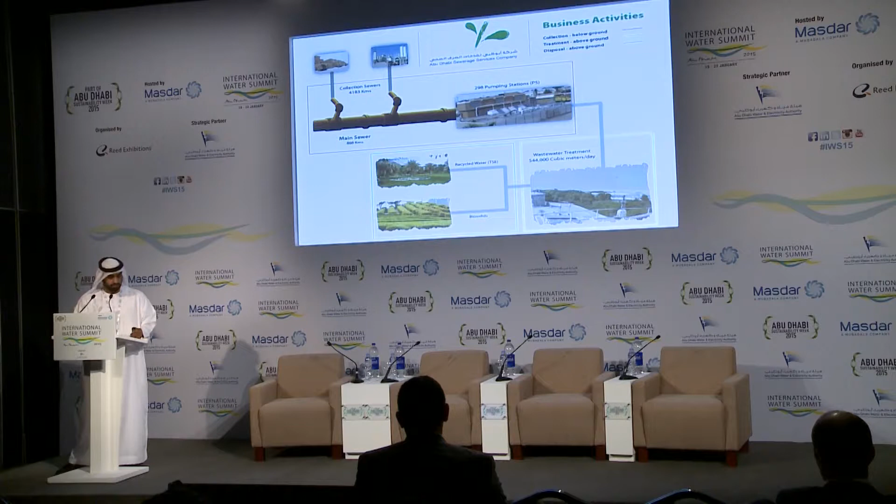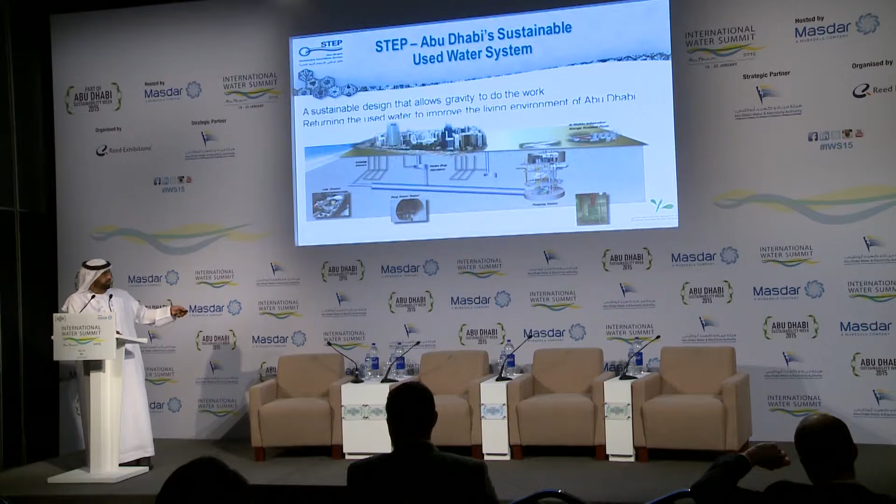And this is the pumping stations that we're building now in STEP, and they pump all the sewage coming from Abu Dhabi Island and mainland to the treatment plant existing in the Wathba area.

So STEP, if you go around Abu Dhabi, you may see the signs of STEP, but really it's just a sign of a place, a manhole that we work in, or we're using to lower the machines, lower the manpower, or the plants to use it. So really it's an invisible surface, where you will see later on the visible surface with the green area, improving Abu Dhabi.

I take this word from late Sheikh Zayed. Really, it's a word that I always remember. I will read it word by word. What he's saying here is that we cherish our environment because it is an integral part of our country, our history and our heritage, on land and in the sea. Our forefathers lived and survived in this environment because they were able to do so. They recognized the need to conserve this environment, to take from it only whatever they needed to live, and to preserve it for succeeding generations. So I really take this word and look at it as ADSSC and as an employee.

So partly, this is the STEP concept. Why STEP? Due to the aging of the existing surfaces, the capacity limits that we have, we are over capacity. And the future development happening in Abu Dhabi, the economical booming, all the building industry, and the time constraints - really we need a fast method to relieve Abu Dhabi and improve the infrastructure.

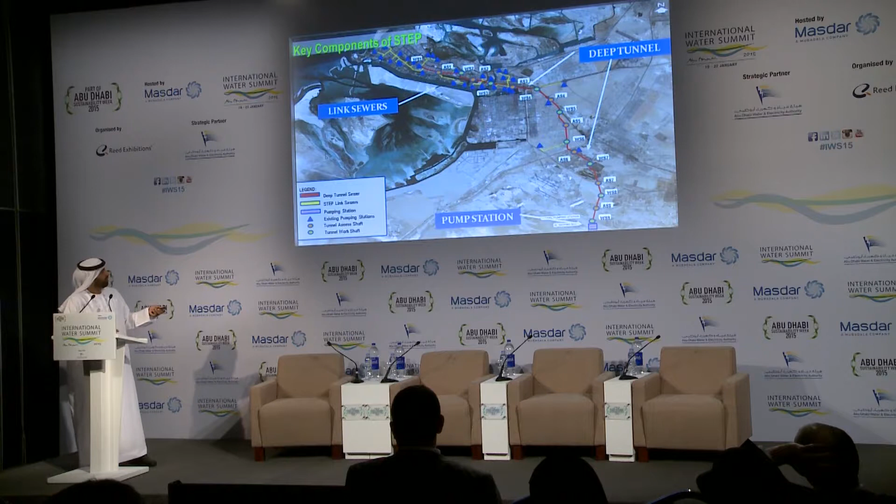So you see along the line, we finished 100% of the tunnel, 41 kilometers, and I'll show you a photo of really what you're going to see on top - I mean after we finish the tunnel, what you will see on the surface.

This is the link sewers. All the green lines are what we finished. In total it's 45 kilometers - we finished around 38 kilometers out of 45 kilometers from the link sewers.

So you see, we work really in a congested area. This is just in front of Khaldiya Mall - this line here is in front of Khaldiya Mall. Here, behind Spinneys, next to the Corniche area.

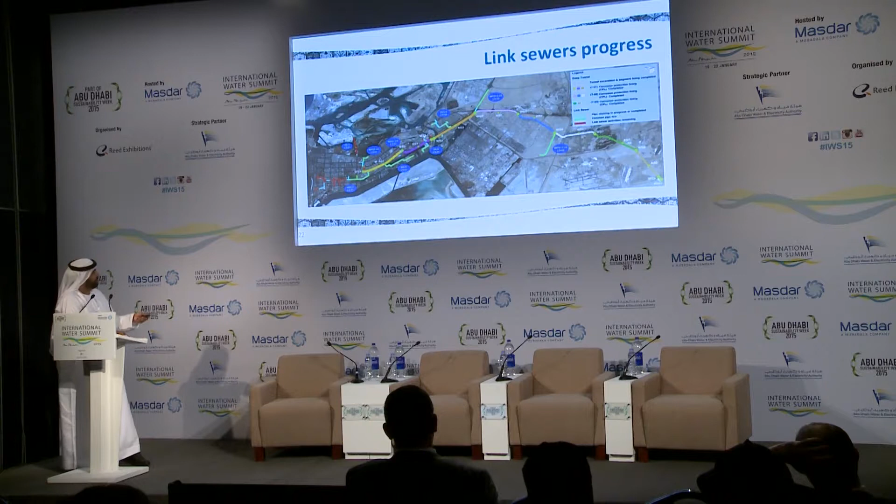So we're almost there. This is another picture of the link sewers. It's LS1 - we finished 44%. And LS2, which is the mainland, we finished 67%.

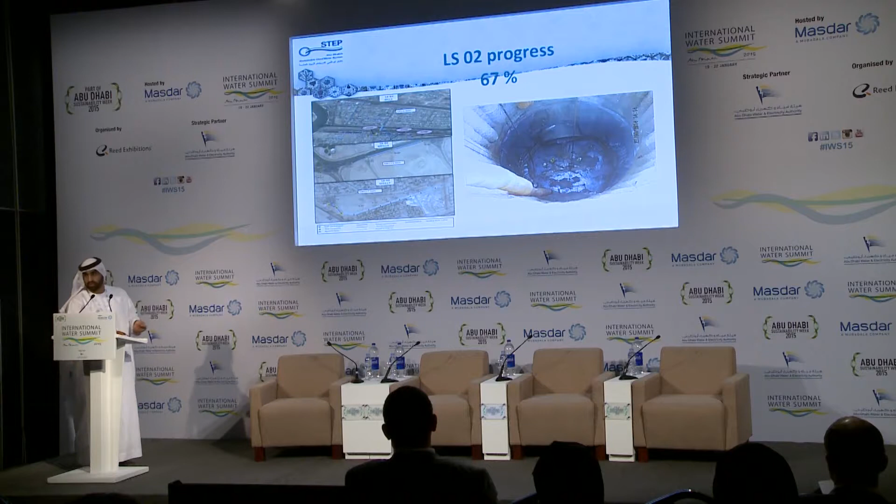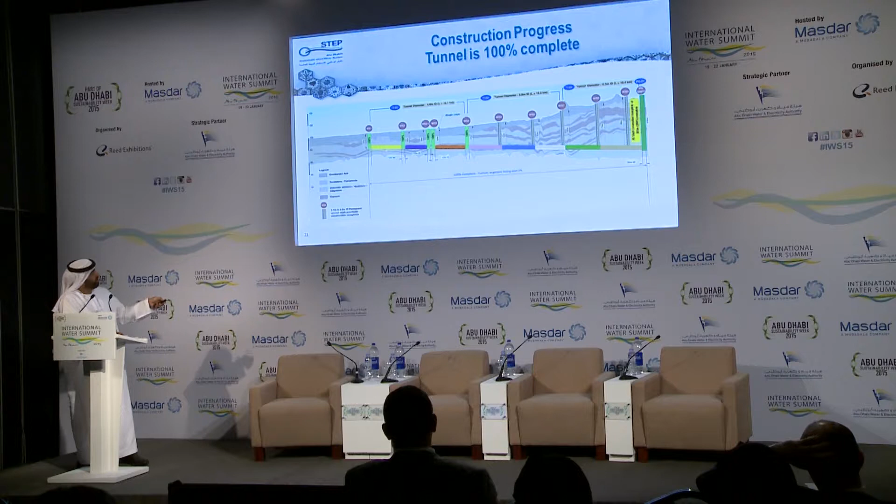So this is the tunnel - you see, this is one of the sections that we have. We have different colors - if you see the earlier picture, this represents different colors. So this picture is taken in this white area.

So as a progress, I would say that we're okay, we're fine, we're almost there to meet the target of 2015, December 2015, to put the sewage in the tunnel.

This is the manhole. I should have a photo, actually - I have it on my flash memory, if someone wants to see it after the presentation, really the progress of work, how far are we. This manhole, the lid is 1.5 meters.

The diameter - actually this place itself was 18 meters in diameter during the construction work. This is used to lower all the TBM machines, the tunnel boring machines, and all the services and employees and plants, whatever we need. So really, you cannot recognize where the shaft is now.

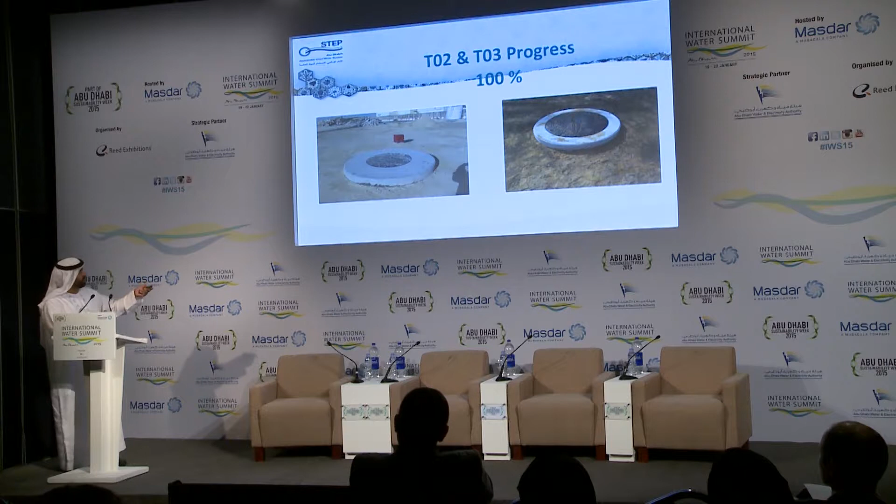Now the pumping station - we have 50 minutes. So the pump station will be the only existing service after the tunnel. I'll show you the different buildings.

So the pumping station, as you see here, the flow will come from the tunnel, will be pumped by 8 huge pumps - it's already inside - and pumped to the distribution chamber here, and given to the treatment plant. So over 105 meters of depth, and 50 meters wide, with ultimate capacity of 38 cubic meters per second.

We're going to use 10 pumps, each of 6.3 kV motors. Actually, in the beginning we're going to use only 8 pumps, but there is a future expansion if we need another 2. We have 2 big generators, in case the main power supply has a blackout or something - we have a standby gas turbine generator which can run the pump to capacity.

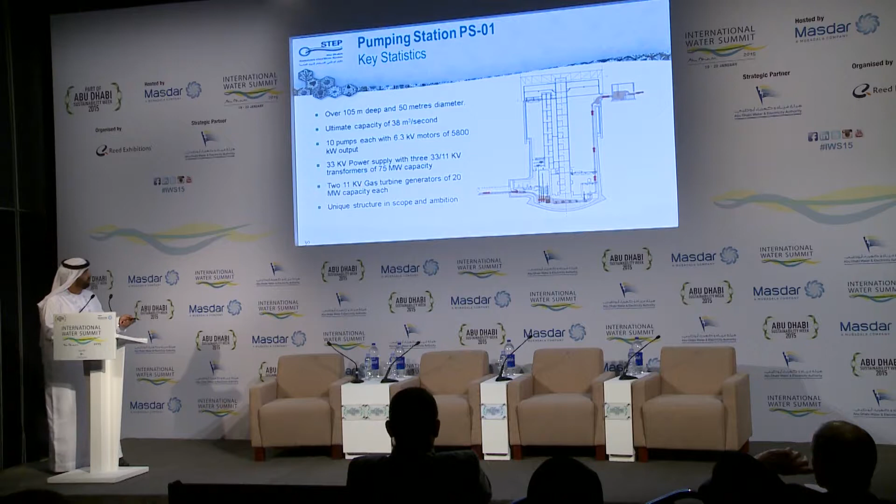I would show this image - you will see really the scale of a man compared to the pump station, human scale. So the pumping station is as deep as 30 stories below ground. So this is the man, see? And here it shows the pump.

Actually, this is just a schematic drawing. So this is the motors, the pump is here - this is what you'll see later, really the progress I will show you.

I've been asked by the summit people to show really the progress and the pump station developments, and how far we are - are we going to meet the schedule in 2015 or not?

So you'll see the next slides going very fast, but bear with me, it will build itself. You'll see the green area - concentrate on the green area, this is the development that's going to happen - but after 2 slides from here.

So this is the location. This is the shaft, the big shaft, 50 meters wide. These are different buildings here, and this is actually the switch gear room and the VFD. This is the odor area here, and this is the TSE water.

This is work shaft 9, the last point in the tunnel, as you see in the line. This is work shaft 9 during the early stage, about 50 meters before we start. We're just starting. This is the pump station.

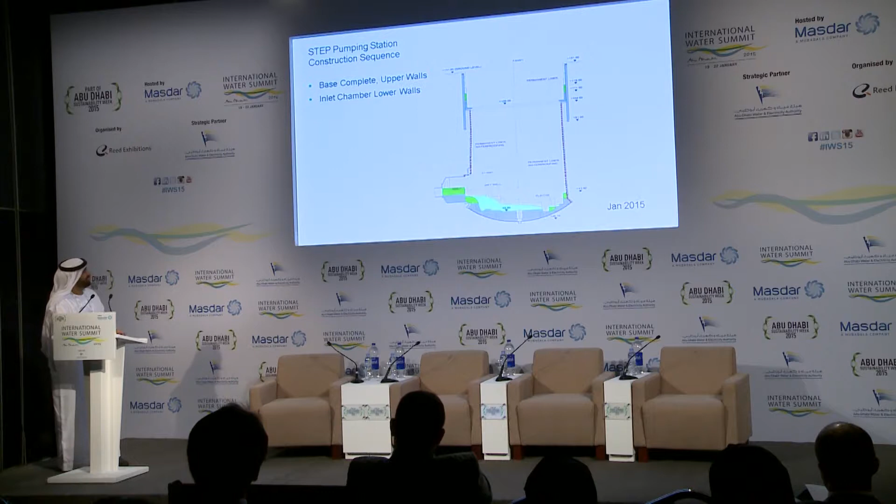See, the wall here is coming up. Now the elevator is coming up. This is the wet well here, on this side.

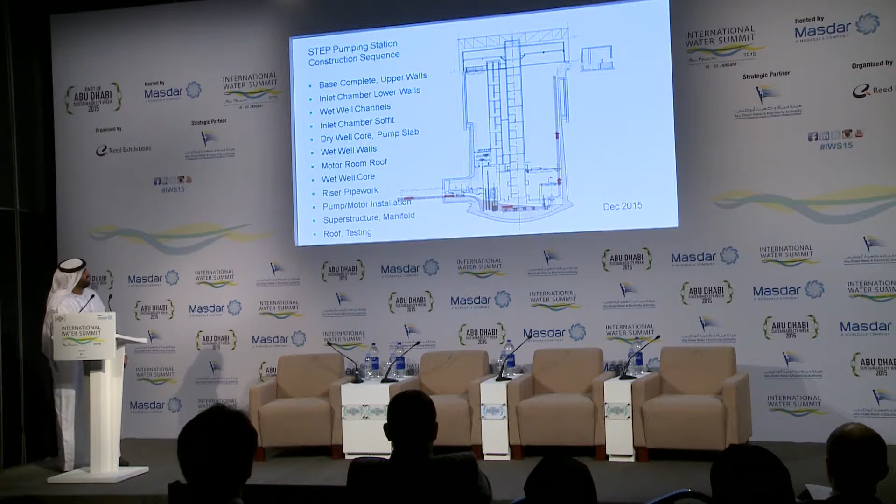And October 2015, November 2015, and now the sewage will come. I think hopefully we'll meet the schedule of 2015. Really, we're working on it, and we are with the contractor and the consultant to meet that date.

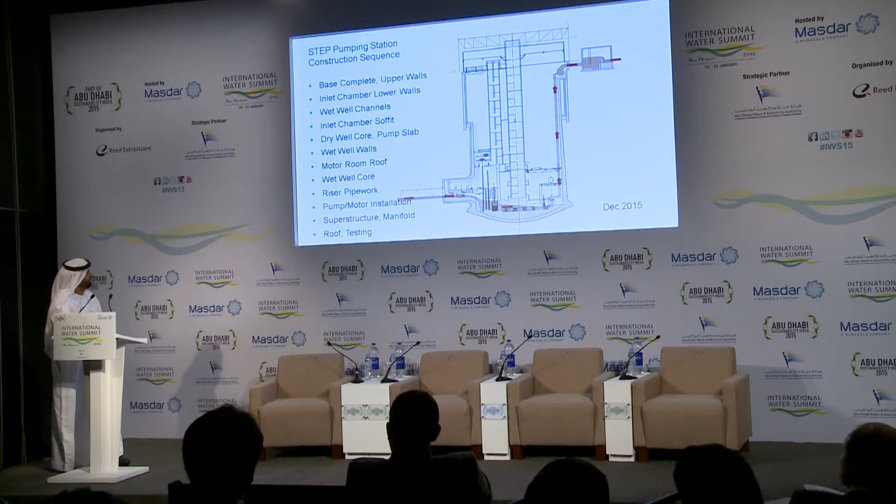And that's it. Thank you.

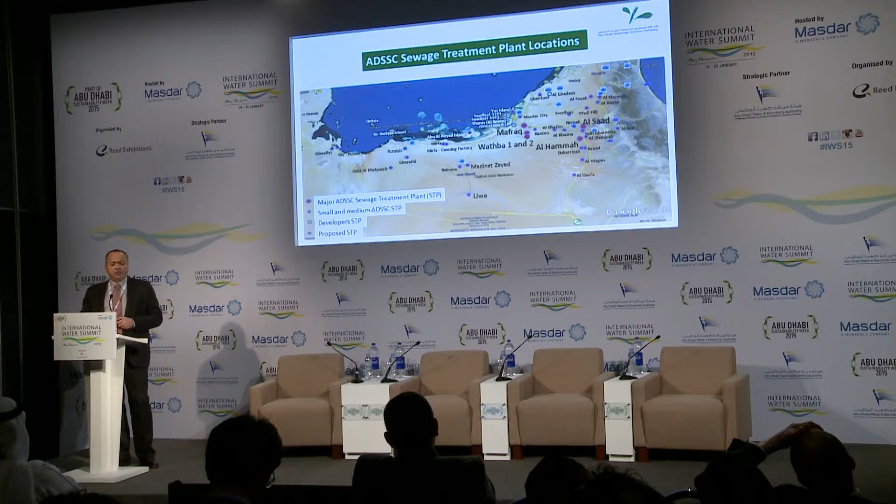I really wish I had rounded those up. I don't want to go on too quickly.

We're not using all the water, which is very unfortunate in my opinion, and we really should be looking at maximizing, fully reusing all of this wonderful high-quality resource. In Al Ain, we have a success story. Almost all of our recycled water is being used in Al Ain through mainly municipal irrigation. In the Western region, the quantities are very, very small, and so there is still a small quantity of water which is wasted. However, it doesn't give us such a big headache compared with Abu Dhabi City.

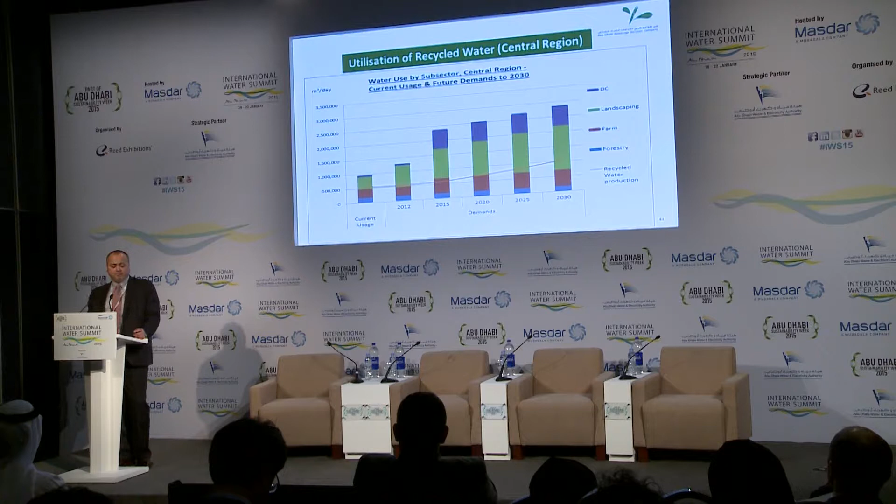So really, the next few slides are just some words which will give you some description of the background. Around 850,000 cubic meters per day in the whole emirate. The recycled water that we produce is only 6% of the entire Abu Dhabi water cycle. The much bigger parts of the water cycle are groundwater and potable water. It's a very high quality recycled water. Our sewage goes through primary, secondary and tertiary treatment with chlorination after sand filtration in almost every one of our treatment plants.

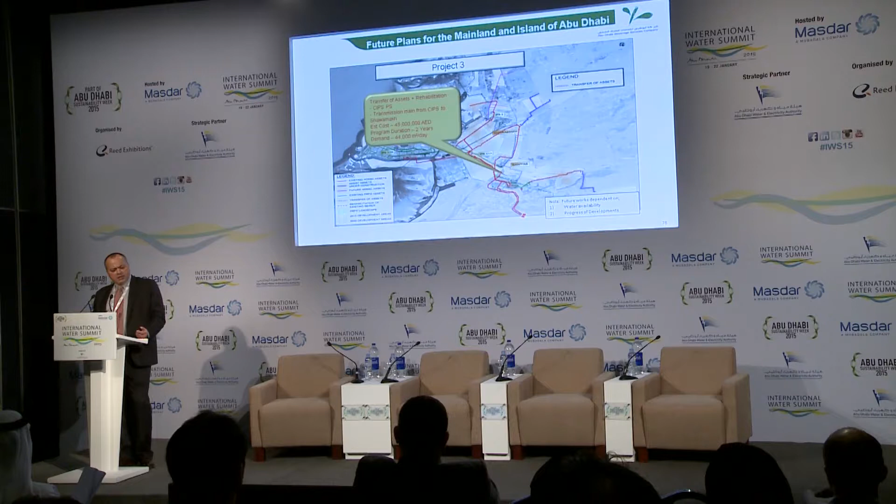Project number 3 is the transfer of assets and rehabilitation of the central irrigation pumping station. 45 million, it would take 2 years to do. Project number 4, I think, is in there. Or have I missed project number 4? Project number 4 is the expansion of the system up towards South Shamka and to North Wapa public housing. Very large housing areas being developed as we speak by Musanada. It will take almost 65,000 cubic meters per day, or 55,000 I can see.

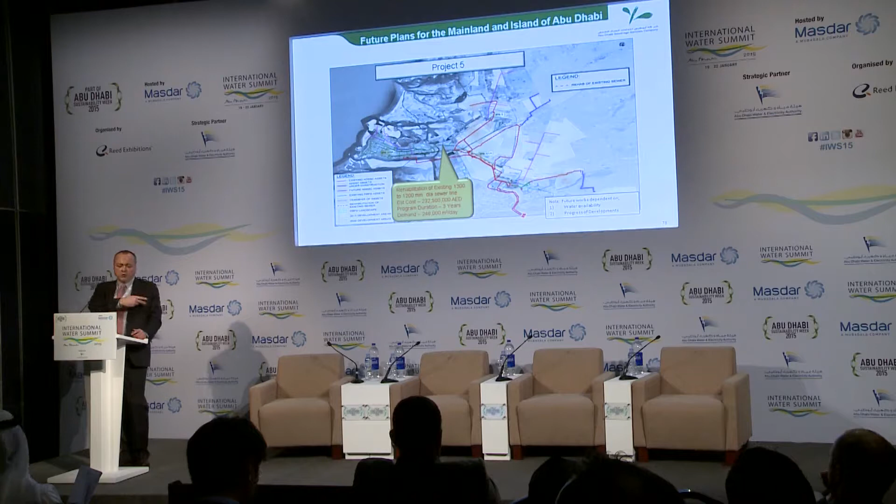223 million. So you can see here we've looked at expanding the city infrastructure, and this interesting one here would be the conversion. We have 2 pipelines at the moment. Once the STEP project is finished, we will be able to decommission 2 very strategically important pipelines that are currently used to pump all the island sewage off the island to the mainland. This project will allow us to reverse the flow in those pipes and use those 2 pipes to convey recycled water back onto the island. Instead of pumping sewage off, we'll take recycled water back onto the island.

Project number 6 is a similar situation up near the Spinneys area, a reversal of a sewage pumping main, to allow recycled water to come back on to that area. And another one which is just a transfer of ownership of IPS 11A, etc. So I'm going to take you through the rest of these, and these can all happen, not all at the same time, but obviously as the demand is there, we could investigate how we would do these in a prioritized fashion if we were to seek funding from the government.

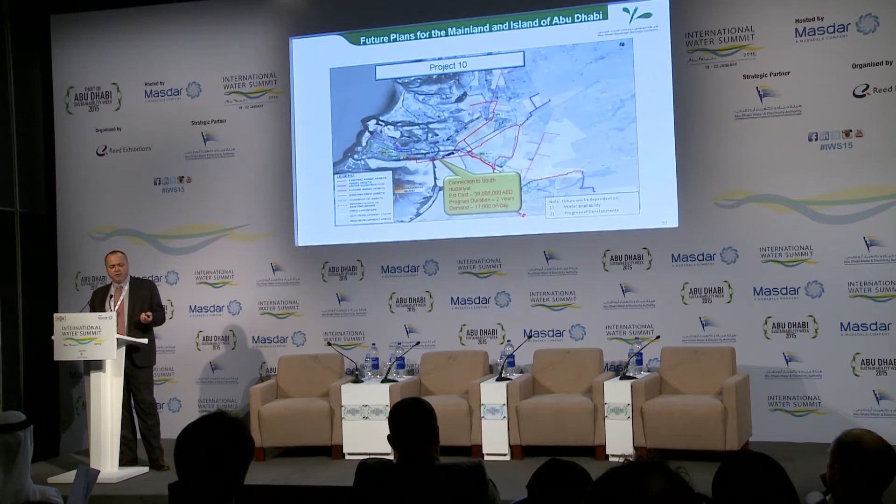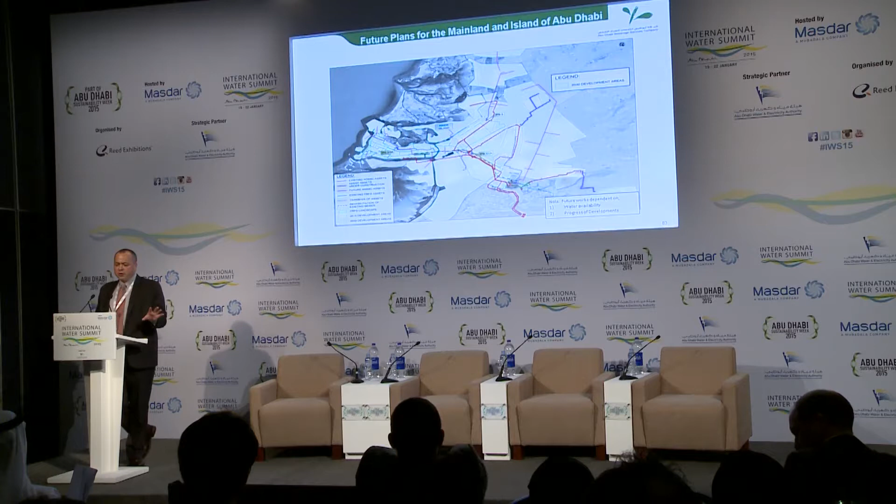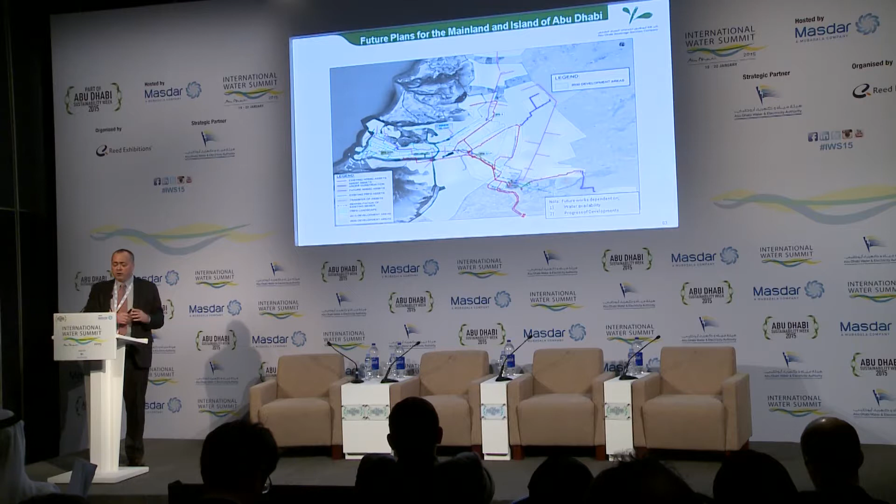And so on. We're looking at South Hudayriyat, and we're looking at all of the city areas in order to get the whole place irrigated. If we were to do all of those projects over the next 10, 15 years, this is the area that we think we could irrigate with recycled water. If we were to apply UPC principles and policy with a view to restricting use, maybe we could even spread the water to a bigger area by using less in some of those areas.

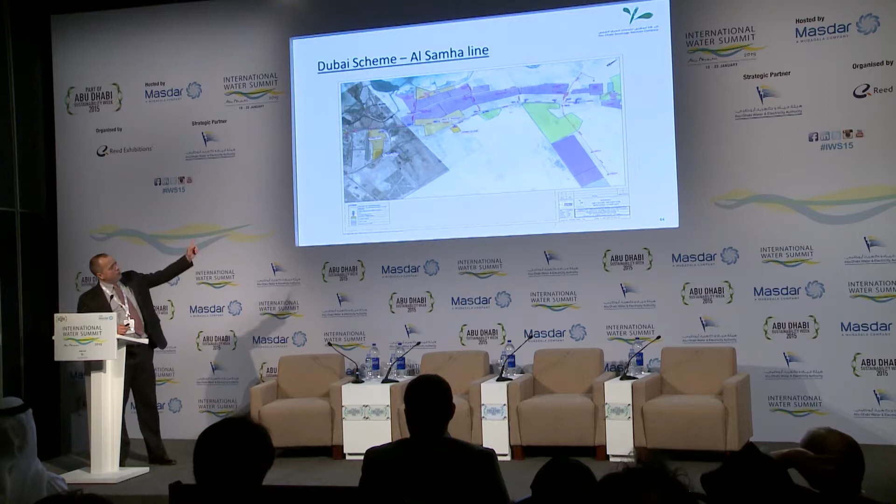The regional expansion schemes, I'm sure some will have seen before. This is the project that we're hoping to award very soon. It's all the way up to Al Jurf Forest on the way to Dubai. These are the demands which we are going to cater to. We've already designed this scheme, and it's with the Executive Council for final award. However, they're considering it amongst other initiatives with recycled water as to whether it will go ahead or not. We've looked at supplying this water to agriculture, forestry areas, farms, and some landscaping.

Right now, this whole area is using potable water from ADDC. So this is actual consumption taking place right now. So if we were to do this scheme, it means we could replace a lot of potable water consumption with recycled water consumption. This is schemes going down towards the western region.

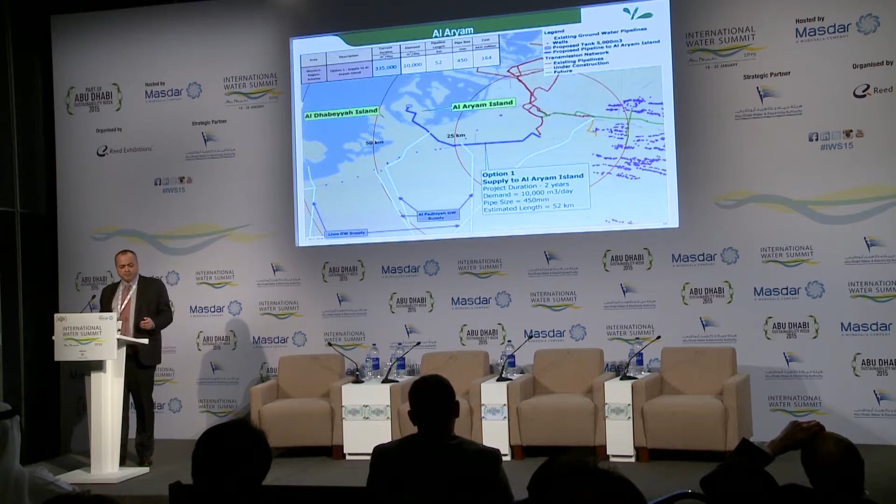The first one is Al Aryam Island. The demand is very small, only 10,000 cubic meters per day. The cost would be 164 million. If you see here, these blue and white dotted lines are lines of groundwater which are feeding these areas of existing consumption from the Liwa wells. So if you can imagine where Liwa is, away off the slide, those white and blue pipelines are feeding groundwater to these areas. That project would take 52 kilometers of pipeline, around 164 million.

Similarly, if we go to, I can never pronounce this one, Al Dhabeyyah Island, the demand is only 20,000, still replacing groundwater consumption. This would cost 218 million. And if we went all the way down to Abu al-Abayad Island, this would cost 341 million dirhams, and have the demand down there, which is around 45,000 cubic meters per day, which will replace groundwater consumption. A combined scheme would cost 523 million, feeding all of those areas with a much larger pipeline.

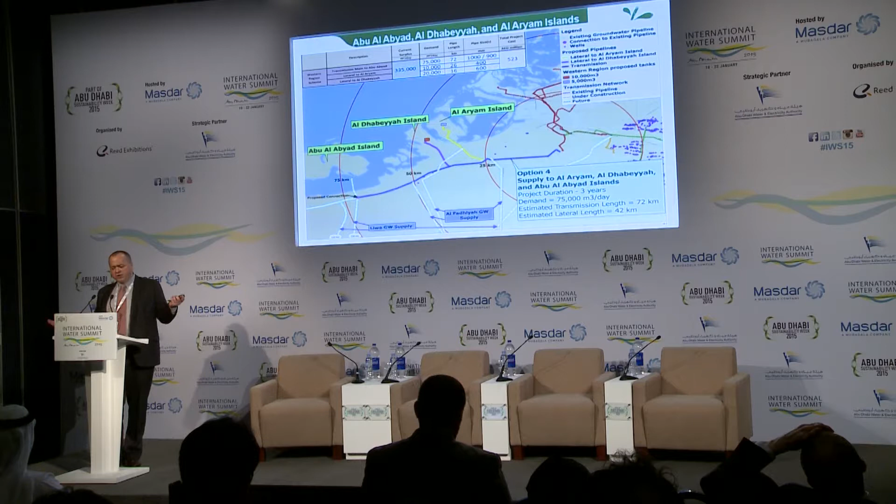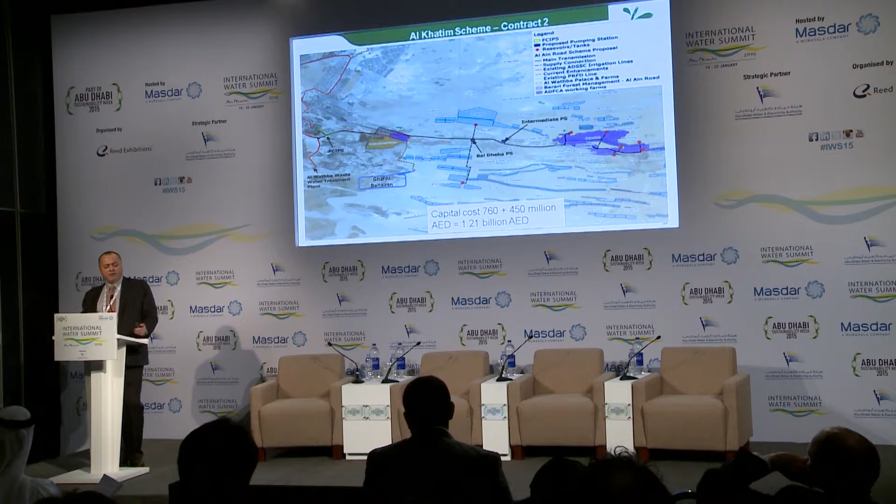Now, here is the Al Khatim scheme, which is going towards Al Ain, up the Al Ain trunk road. This would provide water to Baldiba pumping station, a new pumping station, and feed the areas which are currently using groundwater for irrigation. So this scheme would be replacing other groundwater consumption which is happening right now. And this next one is the same scheme. However, it would be sized to be able to be expanded to the right, to the purple area. The next one, that's 760 million. This would be the full project altogether, 1.2 billion, feeding the blue and the purple areas also.

We have another set of options for this one, which would be to feed another couple of organic farms, which are being discussed at the moment with the higher authorities. Their demand would be approximately an extra 100,000 cubic meters per day. So that scheme again would be revised and it would cost 930 million. And the next one would be 1.4 billion if we were to feed all of that demand in that area with recycled water.

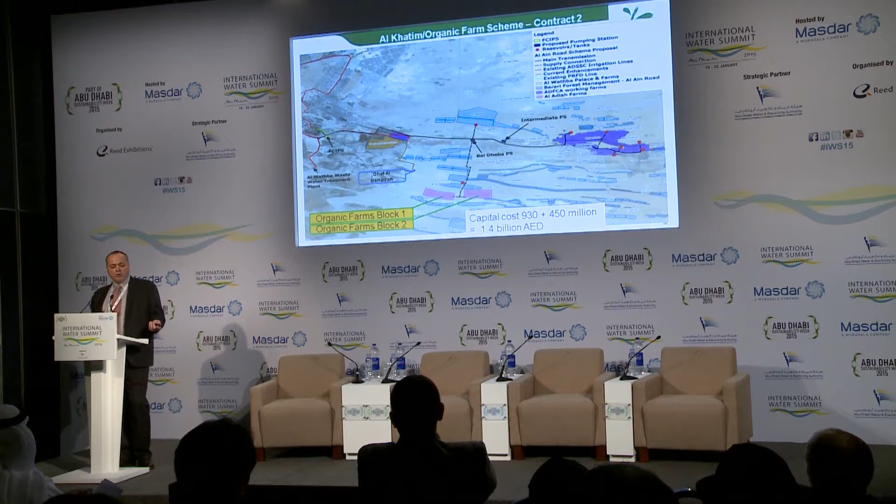Now, with policy and strategy alignment, I'm down to my last 5 minutes here, so I might speed up a little bit. The policy and strategy is something which I've been thinking about for the last 7 years with ADSSC. And the question is always out there, should we reduce potable water consumption? Should we replace groundwater? Should we spend the water on irrigation or landscaping? Do we get hold of all of the infrastructure which is with other entities at the moment under the regulation umbrella to try and help accelerate the development of those assets?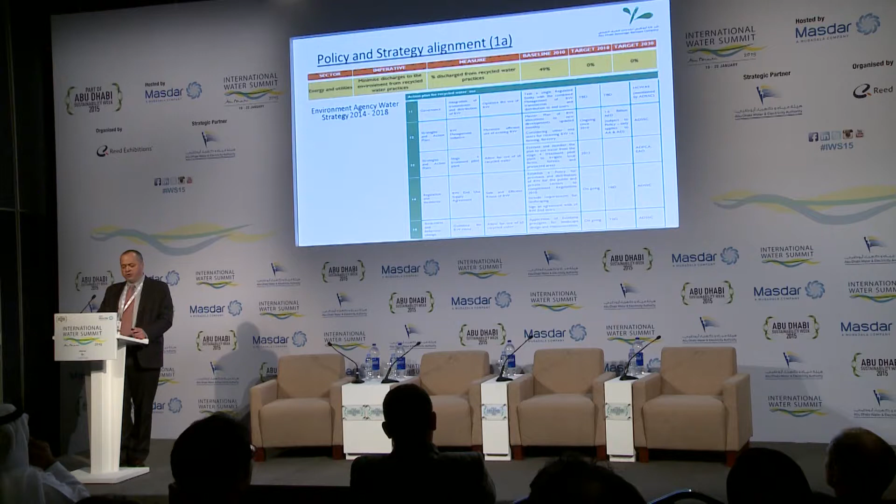Here we have an extract from the Environment Agency strategy, which shows that the target for full reuse of recycled water is by or during 2018. This is the strategy document which came out in 2013, I believe. But here we have the UPC, Urban Planning Council, Plan Capital 2030. They're telling us to have 50% reuse by 2025, 70% reuse by 2030. So this is giving us some confusion in terms of what we need to do as an entity who's responsible for conveying the large quantities of water to the various locations of demand.

The three taps, potable, groundwater and recycled water, are managed by different entities. We have the main stakeholders, the EAD, the RSB, ADWEA, as it says there on the second bullet, who are all very, very relevant and effective stakeholders.

We haven't yet identified how much irrigation and having green areas is worth to us in monetary terms or in other metrics. We haven't yet established what the value is of saving the groundwater in terms of financial or another metric measurement. We haven't yet tried to quantify the intangible benefits of stopping recycled water going to the Musaffah Channel. So really what is required is an integrated approach that may allow one single authority to make the decisions on which water to use where and when and how much money to spend in those projects.

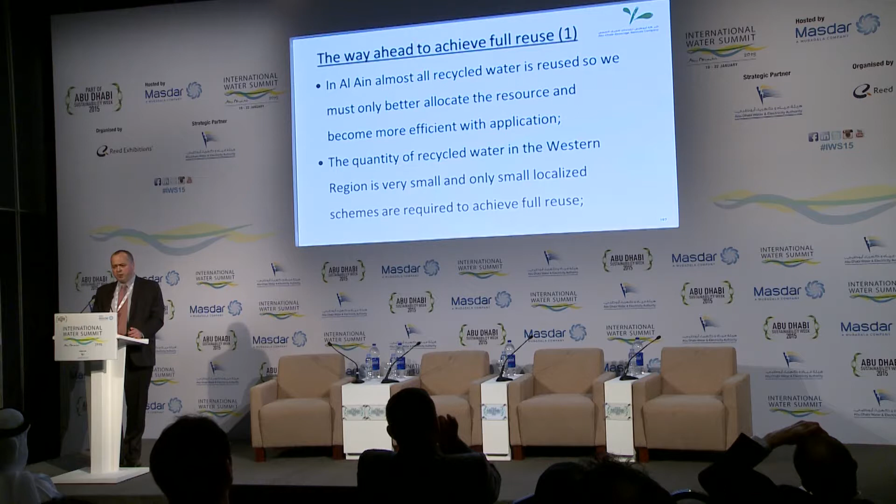So this is a quick summary of what I think we need to do to push us towards full reuse. In Al Ain, all the water is used, so there's not much we need to do up there except to become more efficient with the water that we're currently using. The Western region, the quantities of water generated at the sewage treatment plants are very small, but we still need to put some small localized schemes in place. City irrigation demand is small compared to potable water and groundwater consumption along the Dubai Road and Al Ain truck roads.

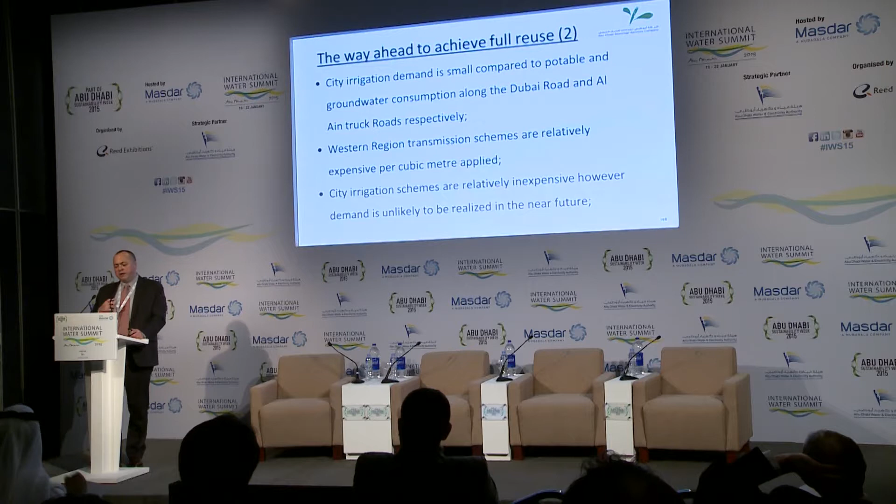However, the Western region schemes are very expensive to push the water all the way down there. The city irrigation schemes would be relatively inexpensive to do, but the demand doesn't seem to be turning into actual consumption in the short term. We've already built the ring main, no one's using the water. If we were to expand further transmission schemes in the city, it's not likely the development would be there to use the water immediately.

So really, and this is being looked at the moment, the recycled water assets, distribution and transmission, should be owned and managed by a single entity under a clear regulatory framework. This is being discussed at the moment by a technical committee set up by the higher authorities, and it involves the RSB, ADDC, PRFD, the EAD, and ADSSC. We need to really try to monetize or get numbers surrounding the intangible benefits of stopping groundwater use, replacing potable water use, and understanding the real benefits of doing that and not putting the water into the channel.

The targets for full reuse are now becoming very, very difficult to achieve if we're to look at the Environment Agency strategy. Therefore, it's looking like the discharge to the Musaffah Channel will continue until such time as we make investment decisions for large-scale transmission schemes. And also, more importantly, I believe, downstream infrastructure is invested in also. We really need to push ahead with the Dubai scheme. This will use up 140,000 cubic meters per day. We really need to push ahead with the Al Ain truck road scheme. That will use an even larger quantity of water.

The remaining surplus could then be used efficiently with some smaller city schemes as and when the demand is actually realized, and we can also consider district cooling and other industry practices such as Emirates Steel and the TAQA waste to energy plant down in the ICAD area.

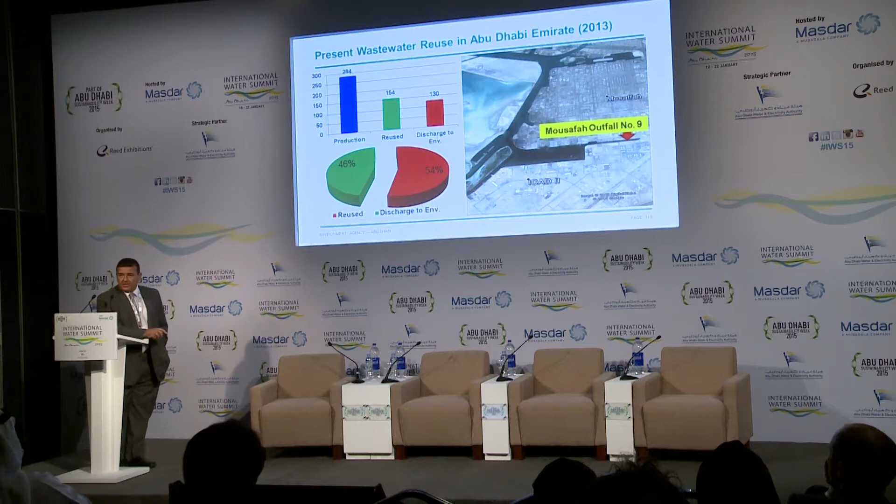It includes a lot of nutrients, and we did a recent hydrodynamic modeling and water quality model for this area, and we found that algal bloom started to increase in this area also, and affects the desalination plants in Umm Al Nar. This is expected to affect our desalination plants' production in the future if it continues and we don't find a mitigation measure to overcome this problem and to utilize this tertiary treated wastewater.

At present, as mentioned by Malcolm and by Nasser, most of this water is used for landscaping and recreational areas in Abu Dhabi Island and outside Abu Dhabi Island. But regarding our expectation, our calculation indicates that the average annual increase in produced treated wastewater is between 8 to 10%. So with this increase, by 2030 we'll have 1.4 billion cubic meters of treated wastewater, if not even more.

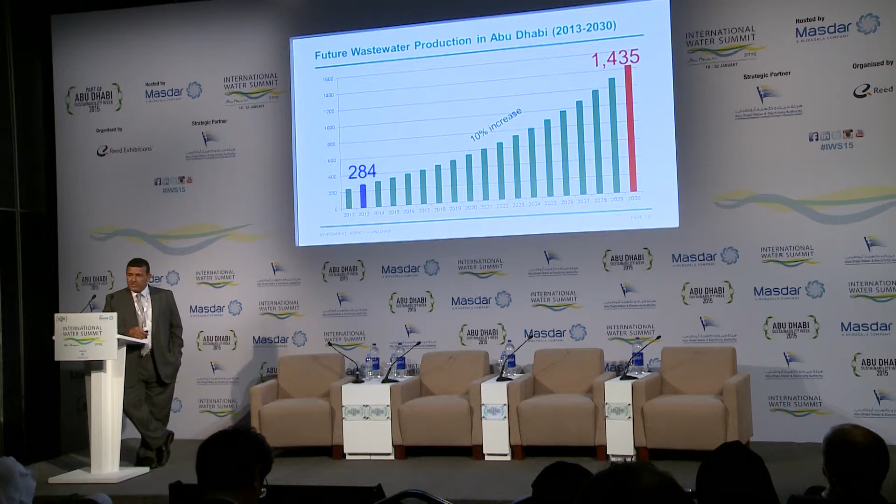So we have a lot of drivers to go to the reuse of treated wastewater. The first one is scarcity. We are an arid region. We don't have enough water. Our groundwater is depleted and over-abstracted because of the extension in the agriculture and forestry sectors. We are pumping 20 folds of the natural recharge to the aquifer system. The water level drop in some areas is 5 meters every year. The deterioration in quality is now a very well-known phenomenon, and in some areas we have groundwater with a salinity of 60,000 ppm, which is double the seawater salinity.

So we have to find a solution. We have many areas in Abu Dhabi Emirate which we call deteriorated areas, where we are not allowing drilling any groundwater well or any development anymore. And we have a lot of investment, a lot of projects ongoing in these areas, and we have to find a solution to protect the economic development in these areas.

In some other areas, we are mainly using desalinated water for irrigation, and we know that 1 cubic meter of desalinated water is costing us between 10 to 11 dirham as per recent RSB reports. So this means we are using a lot of investment for a non-profitable sector, the agriculture and forestry sectors, and we are wasting a lot of desalinated water in these two sectors. So we have to find a solution to overcome the problem of more investment every year in the desalination sector. And the environmental impact, of course.

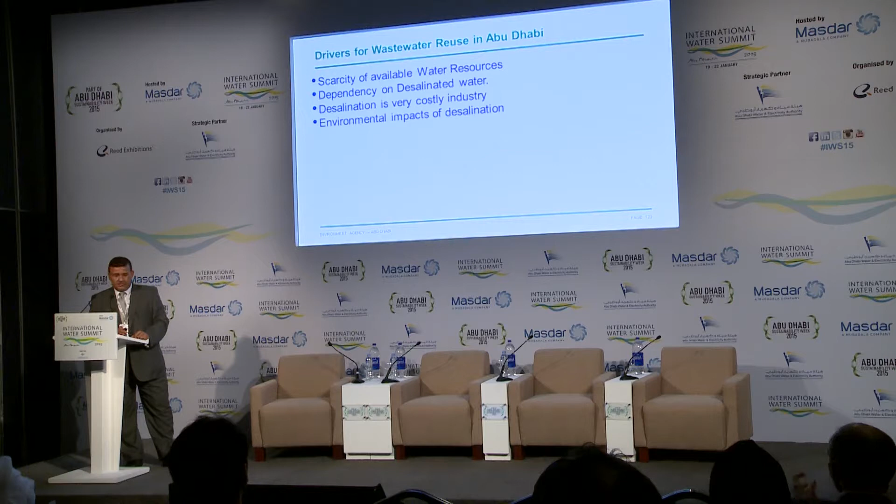So we have two environmental issues. We are discharging tertiary treated wastewater to the Gulf, which has a lot of environmental impact due to the increase of nutrients and its impact on water quality and circulation in the South Musaffah area. On the other hand, we are increasing our desalination plants, using more energy. We have more emissions. We are also discharging more brine water to our marine ecosystem. So we have a lot of drivers that can push us to reuse treated wastewater. The first sector where we can use treated wastewater is the agriculture sector.

We studied and formed a committee to study which crops we can use in Abu Dhabi. Our recommendation as a technical committee is that we can use it at least for fodders. We have a lot of crops like alfalfa, jet, Rhodes grass, and maize which are used as fodder for animals, which could be a potential user for the treated wastewater, especially tertiary treated, in the future, which we are recommending now.

The second use is the increase in amenity plantation, landscaping, and recreational areas, as has been mentioned, either inside the island of Abu Dhabi or outside it in the mainland around the island.

One potential source studied carefully during the last few years is aquifer recharge. Last year, Masdar and EAD formed a joint committee and brought a consultant from Orange County, because they have good experience recharging aquifers with treated water, especially for protecting groundwater aquifers from seawater encroachment and intrusion.

But our indications and results in EAD showed that it is not feasible to use tertiary treated wastewater in Abu Dhabi for aquifer recharge, and this is because of many reasons.

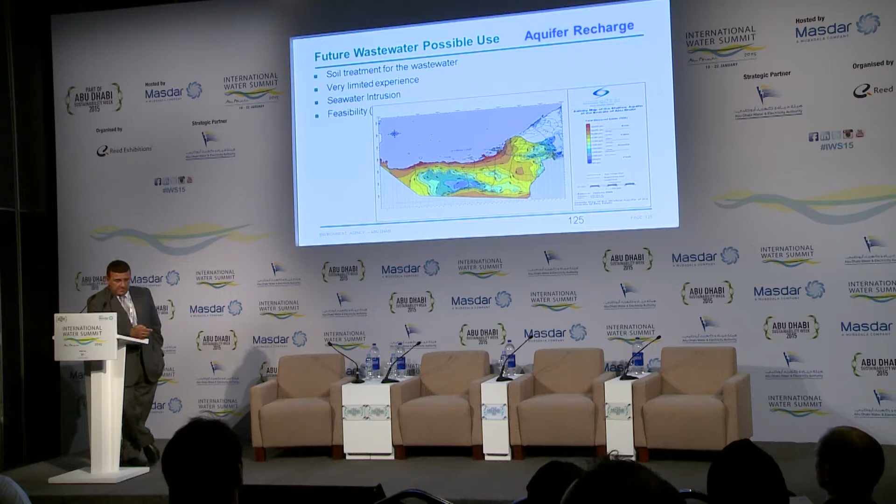And of course it would cost a lot of capital investment, because we would have to build pumping stations, pipelines, and injection wells. So we find it's better, as mentioned by Malcolm previously, to use the water directly. We can use it very simply for direct use, and it will be more efficient and more feasible.

The second sector where we can use tertiary water is the forests. We have about 440 forests in Abu Dhabi Emirate. This is, of course, artificial forest—not natural forest—meaning a forested area with native species of plantation from the environment of Abu Dhabi.

Unfortunately, most of these 440 artificial forests use groundwater, and they are using more than 350 million cubic meters every year. The problem is not only the groundwater issue, but also the capital works and infrastructure needed for distribution, since the groundwater well fields are sometimes very far from these areas, requiring us to transfer and convey the water to where we are using it.

The most important issue is the investment in these forests. Yes, it is an environmental necessity in Abu Dhabi, because it's considered a green belt protecting our infrastructure from sand encroachment—roads, new settlement areas, remote areas. It's also a natural habitat for wildlife, acting as a gene bank for native species in the Emirates.

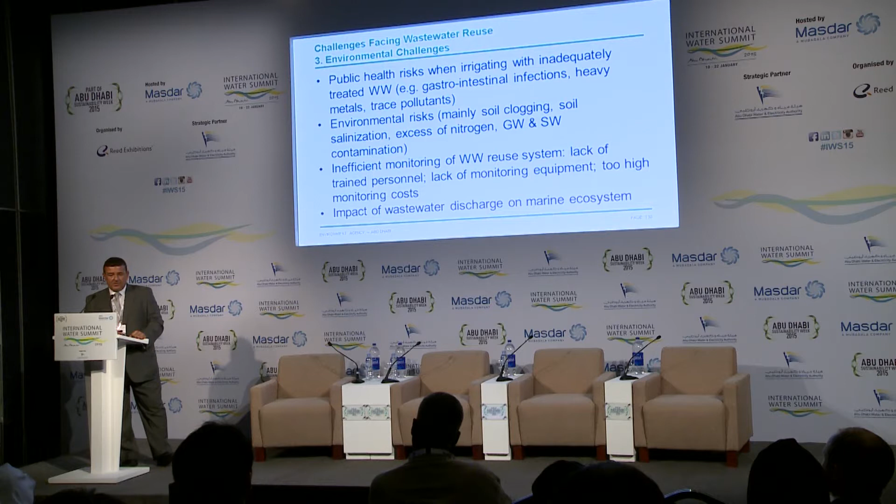And at the same time, it is bad quality - it's brackish or even saline, and in some areas, as I mentioned, hyper saline water, which has a lot of impact on the irrigation infrastructure and the production of these crops. So we have to compare between these issues. There is a lot of environmental impact that is also pressuring us to use tertiary treated wastewater.

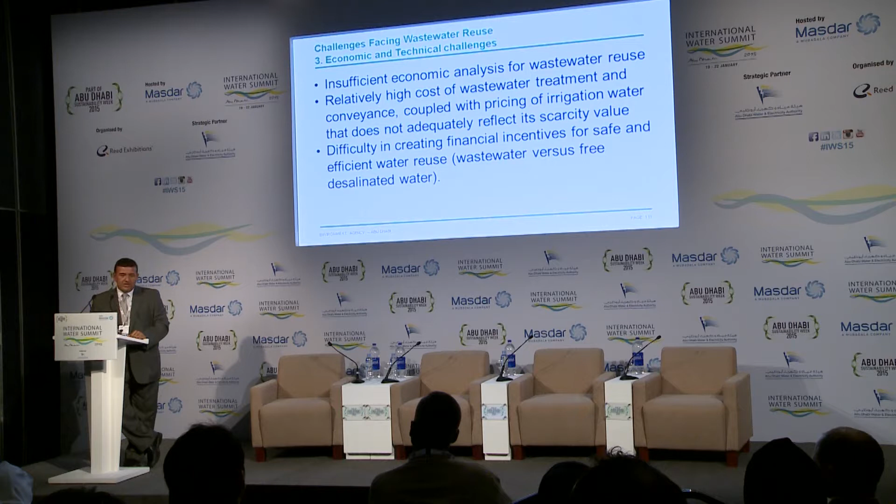Economic and technical challenges - we have a lot of these, but fortunately today I see what has been presented by Malcolm, comparing different projects and how much it will cost us for a unit of water, or 1 cubic meter of water, for each project. This gives us more clear ideas about where we can start and where we can put projects in abeyance and reschedule them in the future. So we have a better understanding now of the economics.

We have about 220 wells in these areas. The length of this pipeline is 80-something kilometers, and this one is 160 kilometers far. The leakage from these two pipelines is something like 40%. So we are producing 10 million gallons a day, but we receive only 6 million gallons here. These two pipelines are 20 years old or even more.

Sometimes we spend 2-3 days just to search for where the leakage is to repair it, because it's in the sandy dune area - it's not accessible, there's no route to reach it, and we have a lot of this. The cost for operation and maintenance of these two well fields is something like 7.3 million dirham a year, just to produce 6 million gallons a day of water for irrigation. The quality here is brackish water.

The salinity ranges between 4,000 to 6,000 ppm. At the same time, we have this treatment plant where we are discharging the treated wastewater at a point something like 14 kilometers far. So if you implement a pipeline and provide them with tertiary treated wastewater, it works.

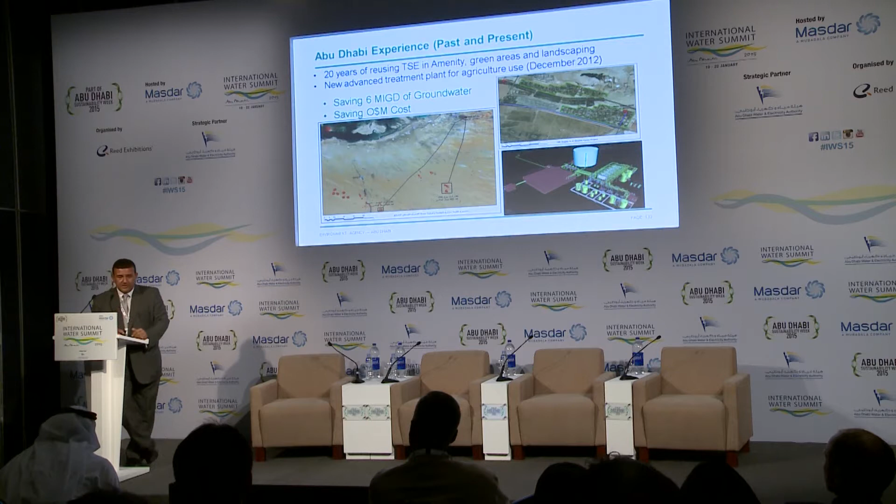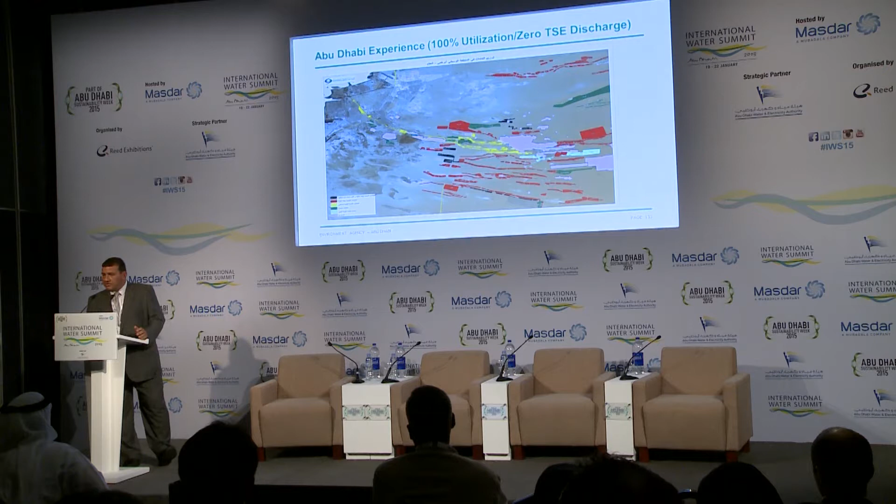This gave us the idea that we can continue, as mentioned by Malcolm, not only with this small pilot project, but also on a larger scale. We are discharging 360,000 cubic meters a day, which is about 140 million cubic meters of tertiary treated, good quality water a year. So we started many projects, which have been mentioned previously by Malcolm.

The most important two, which we think have the most potential, are: Al Ain Road, where we can provide something like 22 artificial forest areas and more than 2,500 farms with tertiary treated water. And the second is along Dubai Road, where we can convey something like 120,000 to 140,000 cubic meters a day to many forests and about 2,000 farms in that area.

I will give an example. We don't have real examples of the cost of groundwater that we can compare to, or calculate the return value of this project. But this is a real project here - we are using about 70 million gallons a day of desalinated water to irrigate this area.

70 million gallons a day of desalinated water to irrigate native species or plantation, which is a salt-tolerant, drought-tolerant species, with fresh water with a salinity less than 200 ppm. So we find that replacing this with treated wastewater, with this 140,000 cubic meters a day, we can at least replace using 30 million gallons of desalinated water.

The cost for the government, the last cost, before even the recent increase of tariff, was 1,000 gallons for 10 dirham. Now it's doubled. I think, Matthew, it's doubled now, recently. So we are speaking about 1,000 gallons equal to 20 dirham. If you multiply this cost, the return value for this infrastructure, which has been mentioned by Malcolm, which is 154 million dirham, the return value is 1 year or even less. So the return value for such a project is high.

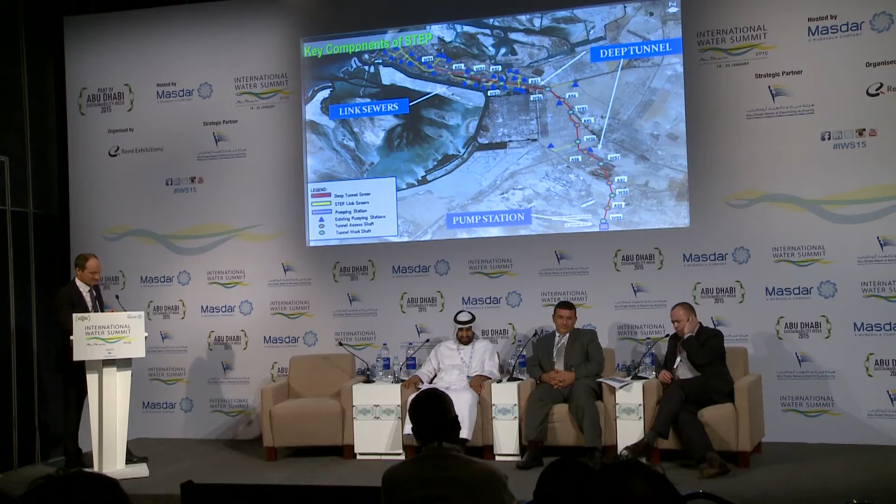Malcolm, I've got lots of questions for you, but I'll only pick a couple. Your project program, those slides of all of the things, they're so ambitious in terms of the scale, the amount of investment, the construction program. It's eye-wateringly ambitious. Is it doable? Is it keeping you awake at night? No. It's definitely doable. I mean, to put pipelines in the ground is a very doable thing. It's a case of prioritizing where to spend the money.

There's extreme pressure on us every year in terms of how much we can spend in capital projects. This year even more so because of the oil price. We're facing big pressure on our capital programs. So what I showed was a large number of projects which could happen. I'm not saying we've asked for money for all of them to go ahead. The city schemes will amount to around 1.2 billion dirhams, the regional schemes more.

So it's really to demonstrate that we, as ADSSC, have looked at the plans, have looked at the technical requirements for the pipe size, the pump sizes, the reservoir sizes, what needs to be done to get our water to the areas that have asked for it. So I'm not saying we want to do them all today or we'll do them all tomorrow. Obviously there would be a staged and stepped progress on all the projects as and when demands come along.

So do you think this is a strategic picture for the next 10 years or the next 50 years or the next 200 years? It really depends, because a lot of the developers say we wanted the water 4 years ago. There's no development. Yeah. A lot of the people will say, you know, Reem Island I have sympathy for. They have built, they are building, they are going ahead, and I can't get them recycled water.

However, with the tunnel wastewater connection, which is coming on from Reem Island to the main island to connect to the STEP tunnel, we've included a return recycled water pipe in there for them. So we will have a recycled water pipe going across the water, but we will be missing infrastructure on this side, and they will be missing infrastructure on their side.